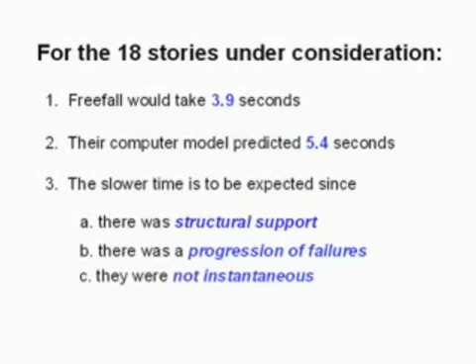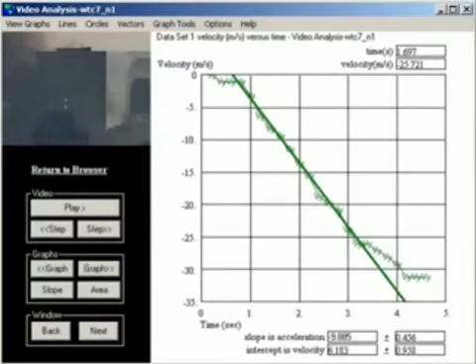All of this makes sense as long as you don't look at the evidence. The evidence shows that free fall actually occurred, but since their computer modeling could not come up with a scenario that would allow for free fall, they had to declare free fall out of bounds and try to cover up the evidence. The problem is, unlike the columns and girders buried deep inside the building, the motion of the building is right out in plain view.

Since their model predicted 5.4 seconds for the 18-story collapse, they dutifully conjured up a 5.4 second measurement to match. They had to stretch themselves to do it, but they did it. They found the disappearance time, then went out of their way to pick an artificially early start time, exactly 5.4 seconds earlier. This they compared with free fall time.

This next question comes from Dr. Stephen Jones. NIST discusses the fall time for WTC-7 on page 40 of the summary report, where it's stated, assuming that the descent speed was approximately constant. However, observations by others of the descent speed show that the building is accelerating rather than being at constant speed. So the question is, why did NIST assume that the descent speed was approximately constant?

Stephen Jones was calling attention to the obviously erroneous claim on page 40 of the draft report that stated the building descended at constant speed. I'm sure constant speed was a simple misstatement. The correct response should have been, whoops, we'll fix that.

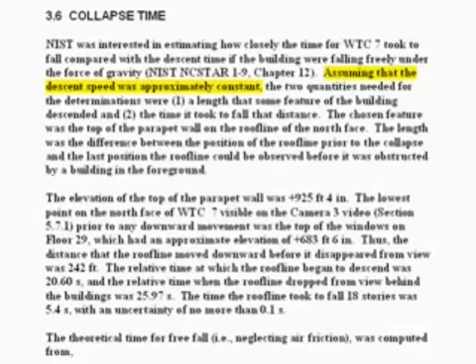But no, here's how they handled that question: Force of gravity, obviously the acceleration of gravity, is what's the driving force, and our calculation was based on the amount of time from the top of the parapet falling until it disappeared from view between the two buildings seen in the video.

That time was established from the video by single frame search, so that was down to 1/30th of a second, and then we did the same thing for when the top of the parapet disappeared. We found that time to be 5.4 seconds.

I didn't hear a whoops in there, did you? This is John Gross, one of the lead engineers for the NIST report on the collapse of the Twin Towers. He has a PhD in structural engineering from Cornell University. He taught engineering at the University of Colorado in Boulder. He has a long resume on top of that. Don't you think he probably knows the difference between speed and acceleration? Don't you think he could explain it with perfect clarity if he wasn't so preoccupied trying to cover his tracks?

Don't you find it interesting that the 5.4 seconds he measured for the collapse time just happens to exactly match the theoretical prediction of their model? That kind of precision is incredibly rare when modeling real-world events. Incredible is the right word. It's not credible.

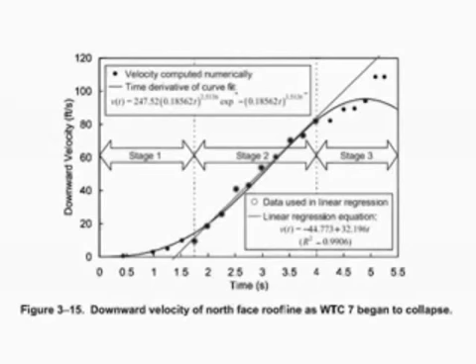How are they going to handle all the ramifications of that inconvenient fact? Read on. It says the 3 stages of collapse progression described above are consistent with the results of the global collapse analysis discussed in Chapter 12 of NIST's NCSTAR 1-9. That's it. Freefall went from an impossibility that required backflips in logic to obfuscate, to a simple fact to be measured.

Then declared consistent with their fire-induced collapse hypothesis. Apparently they have now decided that freefall is okay as long as it is seen as part of a longer stretch of time that covers the required 5.4 seconds. In other words, they dropped the bullying tactic of blowing smoke to obscure the facts, and adopted an alternate bullying tactic: cover it with a lie and walk away.

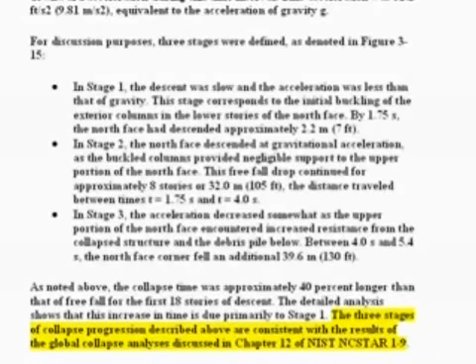However, NIST cannot walk away from freefall. Now that NIST has certified freefall as fact, take a look at the implications.

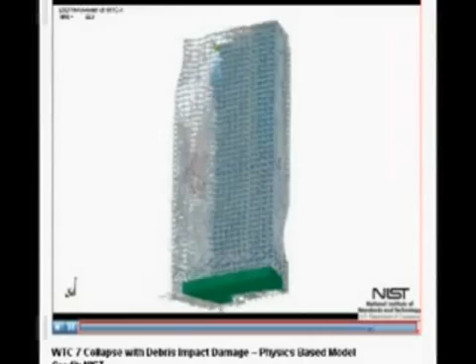On November 20th, 2008, the National Institute of Standards and Technology released their final report on the collapse of World Trade Center Building 7. Building 7 was not hit by a plane, but collapsed at about 5:20 on September 11th, 2001. The report is available at the NIST website on the screen.

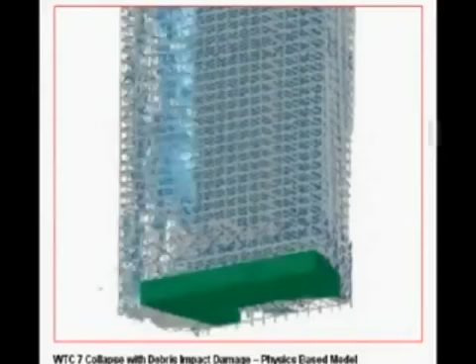The report contains 2 computer simulations of what might have happened to Building 7. One simulation shows how WTC-7 might have collapsed because of fires and damage due to falling debris. NIST explains the mystery of Building 7 as a progressive collapse in the interior, as we would expect from a fire collapse, but a simultaneous collapse of the outer shell or facade.

Does the simulation look anything like the videos? No, it does not. So what good is it? We have all heard the story of the Emperor's new clothes. In that story, the scam was that only the smart people were able to see his expensive new clothes. Too many of us assume that if we can't see how the simulation resembles the videos, we must be stupid.

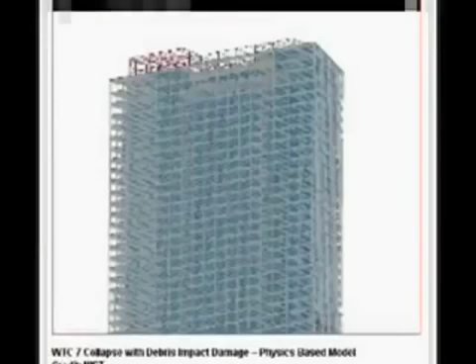We noticed several unexpected things about the NIST video. First, according to the simulation, the internal structure of WTC-7 collapsed, leaving an outer shell or facade. According to NIST, it is the collapse of this shell or facade that we see in the collapse videos we have all watched. If the NIST simulation were correct, wouldn't we expect to see some damage to the facade? We see several broken windows, but nothing suggesting that beams and floors are falling to the basement.

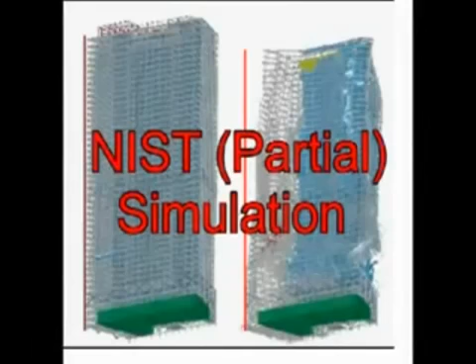The NIST simulation shows Building 7 leaning toward the west. In reality, the building remained straight as it fell until it tipped toward the south at the last second. Surprisingly, the simulation ends about 2 seconds after the northwest corner of the main roof starts to drop. Naturally, one wonders why. We can imagine how the simulation would finish, and we can play with the simulation images to approximate the rest of the collapse.

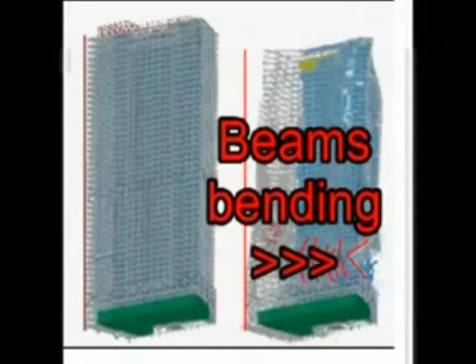When we do, we remember immediately that the collapse scenario NIST has simulated is totally incompatible with free fall acceleration. NIST has now admitted that free fall happened, largely because of David Chandler's work. The problem is, a building cannot collapse at free fall acceleration unless something gets the lower supporting structure out of the way. A building that collapses while crushing its supporting structure cannot drop at free fall acceleration. Perhaps this fact explains why NIST ended their simulation early. They did not want to address the issue of free fall acceleration.